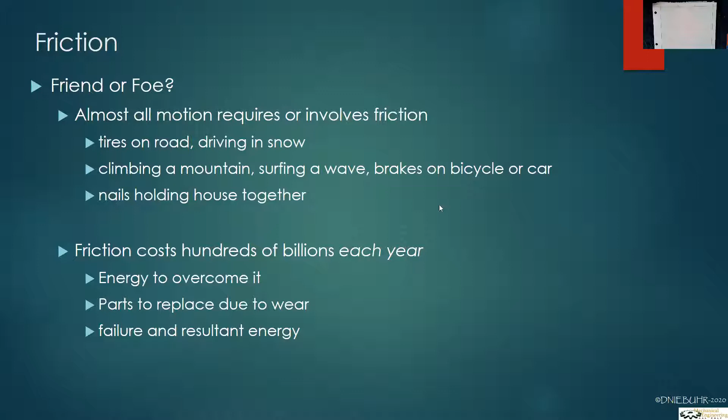And so how do we actually solve problems or calculate answers?

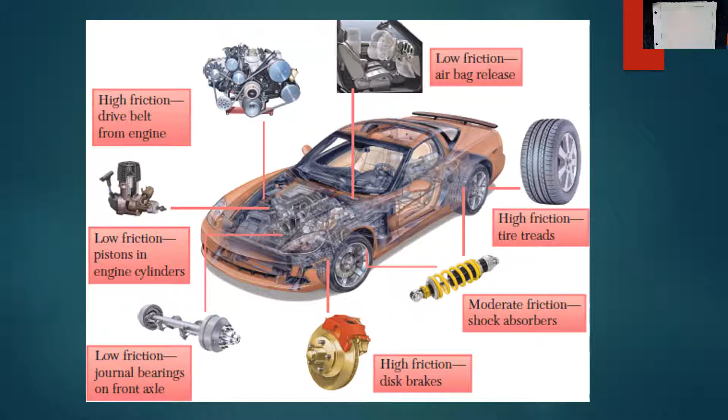Before we jump into that though, to have some idea of where friction comes from, think of two surfaces that are in contact - they're never really truly in 100% contact. If you have a book sitting on a table, or a piece of wood sitting on another piece of wood, or any hard, real engineering surface, you're only going to have about 1% of the contact area, compared to the observed area, actually in physical contact. That has to do with the natural surface roughness that exists on all surfaces.

Even surfaces that are highly polished still have a fractal pattern of roughness. The scale might be different - the distance between peaks and valleys might be a matter of nanometers. But as far as the distribution of peaks and valleys, it turns out that whether you're looking at something under an atomic force microscope or the coastline of a country, the pattern of the valleys is very similar. So it's an interesting idea.

But what does this really have to do with friction? When two surfaces come into contact and you press them both together, there's a tendency for those two high points to plastically deform. If you think about stress as force over area, you have a very small area and the contact forces become very high, causing a high stress that makes the two materials deform. Now when they deform, they have a tendency to lock together. So when you start to push and try to move two surfaces apart, it takes more energy to break the surfaces apart than it does to keep them sliding once you've broken them apart.

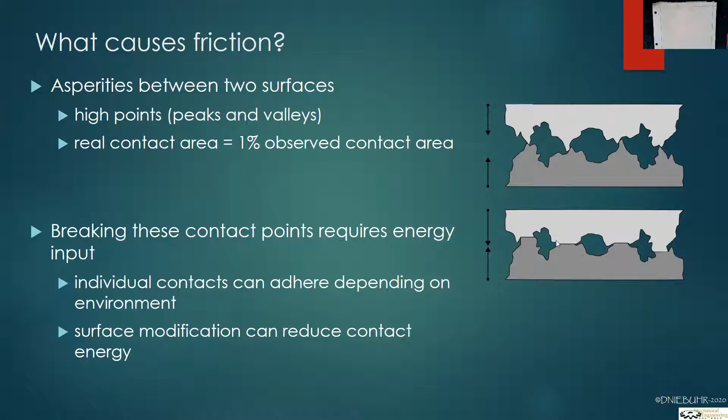For something that's on Earth, the advantage is that, with the exception of very few metals — the noble metals — oxides tend to form on surfaces, and these oxides actually form a natural lubricating layer between two opposing surfaces.

If I were to take two pieces of metal, say titanium or stainless steel, and put them together in a vacuum, they would actually stick together, and the force required to pull them apart would be really, really large. In fact, it would make the coefficient of friction appear to be a number as high as 100 — we'll discuss shortly what that means — but it loses its physical meaning in vacuum.

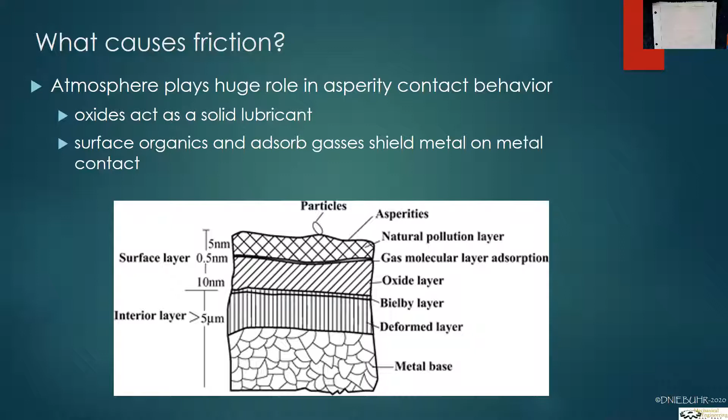Typically on Earth, though, because you have the oxide layer and you also have all these adsorbed gases and just junk — organic materials, oils from your hand — those help to prevent the two surfaces from really contacting metal on metal and essentially cold welding to one another.

An example of this was the Galileo high gain antenna, launched into orbit by the shuttle Atlantis back in 1989. It had originally been scheduled to be launched sooner, but because of the Challenger blowing up in 1986, it put kind of a moratorium on shuttle missions.

The way the high gain antenna operated, think of it as an umbrella — once the satellite was deployed, it was going to open up like an umbrella, allowing images to be more efficiently beamed back to Earth. This actually traveled to Jupiter and beyond and took some really high-res pictures of Jupiter and its moons.

Unfortunately, the unit itself was built at Jet Propulsion Lab down in Pasadena, and it traveled to Florida and back several times — I've read 3 or 4 times. As a result, the solid lubricants used in it became, essentially, not quite dried out, but they became fractured, and they didn't operate as designed.

That's a whole other detail, but you can't use liquid lubricants in space, obviously, because they'll just evaporate. So they use what are called dichalcogenides, which are a metal and a sulfur, like molybdenum disulfide — graphite's another example. They use these in space because they maintain their lubricating properties even in the absence of any air.

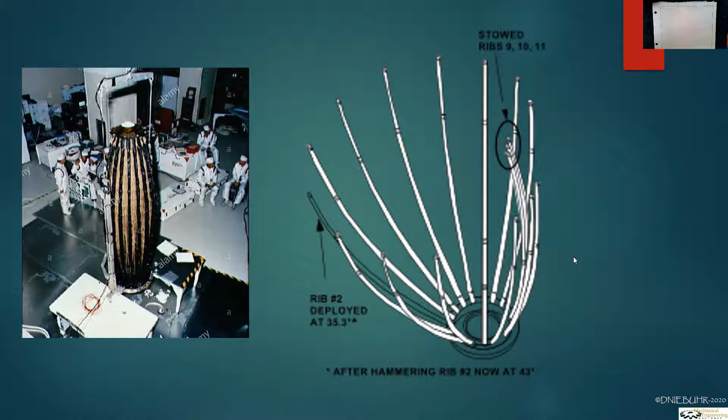Okay, now we're here to static friction. As you may remember from physics, you start off with just a simple block sitting on a surface. We know that the normal force is just going to be equal to the weight, or essentially whatever the reaction is of the surface to the block.

If we were to push down on the block with something besides the weight, that would add to the normal force. We also know that if you apply a force P pushing the block to the right, and assuming the surface has friction, it's not a frictionless surface, then the friction will match 1-for-1 with the applied load. So if I apply 1 Newton to the right, the friction force is 1 Newton to the left. If I apply 2 Newtons to the right, it's 2 Newtons to the left.

And so it'll match 1-for-1 until I reach the maximum friction coefficient, or the maximum friction force. So the friction max is defined as the coefficient of static friction multiplied by the normal force. Another way to say that is if you were to take the force required to break free and divide that by the normal force, that would give you your mu static.

And so once you reach that point, you'll be in this transition mode where the material will start to, or the block will start to slide.

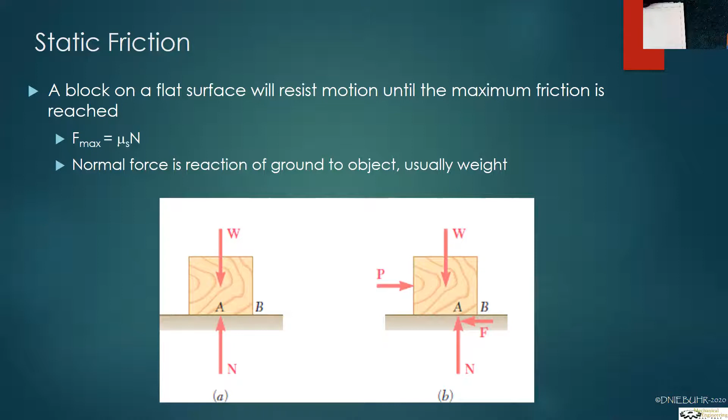So if we think of it from a starting point, if we apply P when it's vertical, it's just going to be added to the normal force. So in this example, we have no sliding friction or no friction at all because there's no lateral force. This is in the first situation.

In the second situation, we're applying P at an angle. So we have the y component of P is going to be added to the normal force. And that's why we say normal force is equal to Py plus W. And then we also have the weight. But at this point, we haven't created enough force to overcome the mu static times the normal force. So until we reach that point, we aren't going to go anywhere.

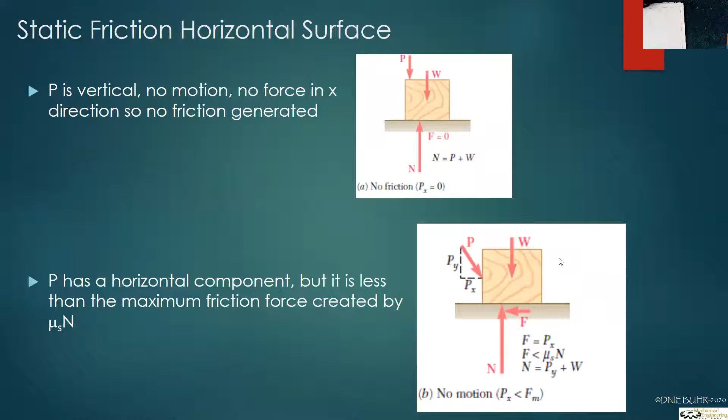And then we get to the third stage, which is where we're just about at impending motion, and that would be where the x component of P is equal to the mu static times normal.

So when you say equal to, mathematically that's easy to see, but in reality it doesn't just go from not moving to moving. There's kind of this stiction transition, and that transition is difficult to measure in real life because, as you can imagine, the asperities, the peaks and valleys of your surfaces are locking, unlocking, locking, unlocking. And so from a measurement standpoint, it's kind of a rough area, and then you get the release, and then the material starts to move.

And that's what we have in the last case, where you have motion. And so at that point, the friction force drops because your kinetic coefficient of friction, mu kinetic, is generally always less than mu static. That means it requires less force to keep it moving than it did before.

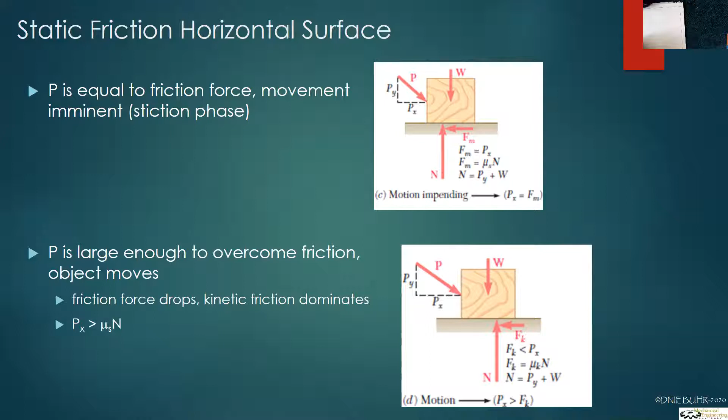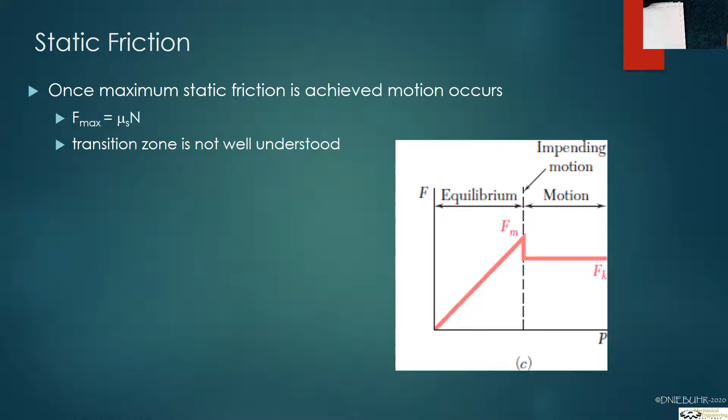All right, so let's talk about static friction in a simple example. I picked this example because we have an object on a block, and it has a mass of 50 pounds, and then we can apply a value P to it however much we want.

And we can see that unlike our other problems that we've done in this class, there's usually one way to solve them, or maybe a couple ways. You can use a force triangle, or you can sum moments. But there's usually one defined situation, or one defined outcome, or we're finding a moment, we're finding a result, we're finding force.

In this case, friction is a little more tricky because we have multiple things that can happen in the situation. So if you picture it, if I apply a force P, and if my P force is great enough, that block is going to slide up the incline. If my P force is not enough, let's say there was no P force, then most likely that block is just going to slide down. Or you have a region, a range of P values, where the block will just stay put. So there's enough to keep it from sliding down, but not enough to start it sliding up. And that becomes the tricky part of figuring what that is.

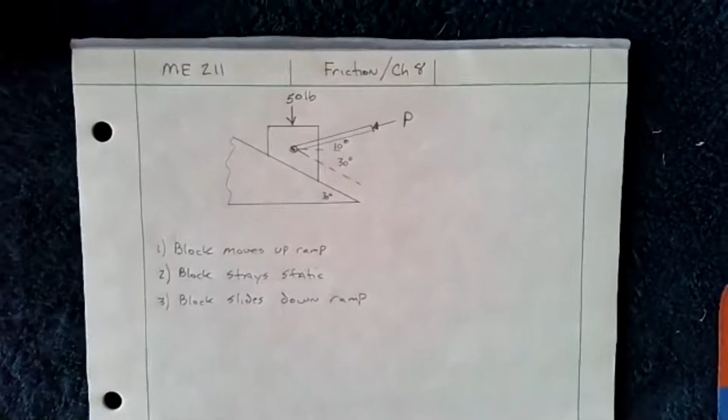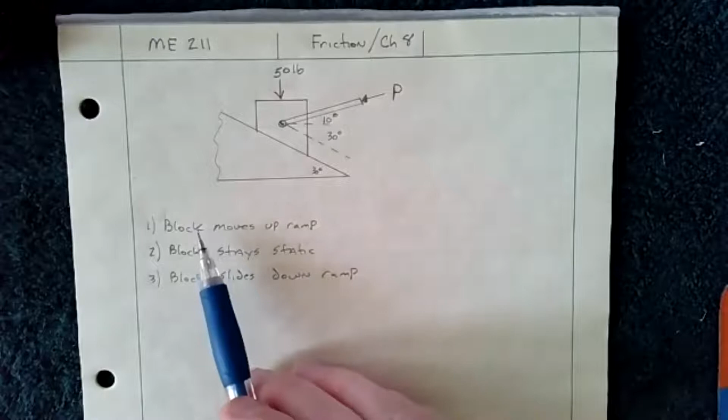So let's look at some different situations. Here's our drawing. We have mu static and mu kinetic, 0.4 and 0.3 respectively, and then we have this load. Here we have this redrawn, and so I have my load P. I have this whole angle's 10 degrees to the horizontal, and then I have my 50-pound load here, and the block can move up the ramp, block stays static, or block slides down the ramp.

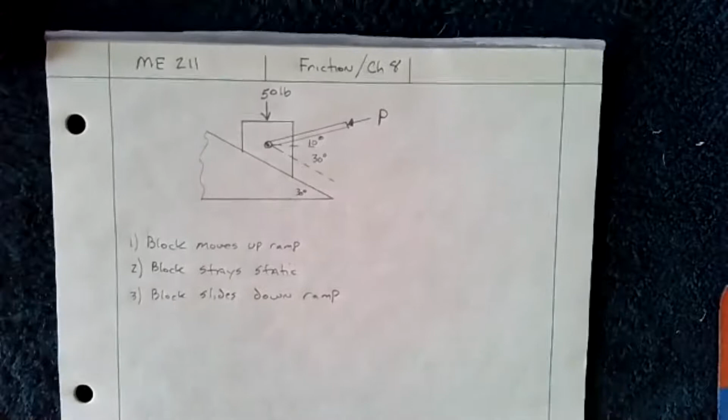So what are my situations? Let's try something first. Let's say we didn't have anything, let's say we just started with no load whatsoever, let's just say P was 0, then what would happen? Let's go ahead and draw that free body diagram and see what that would look like.

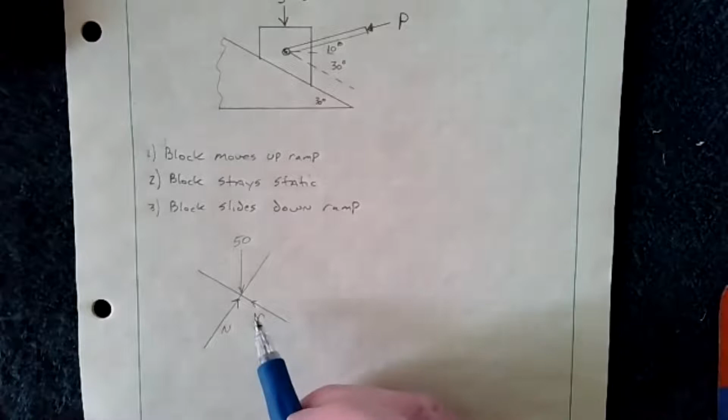So here, if we have no P whatsoever, what I've done is I've tilted the axes. This is 30 degrees here, and we have friction force going up the ramp because if it wants to slide down, friction is going to oppose it. If N is going up this way, that's going to be normal to the surface.

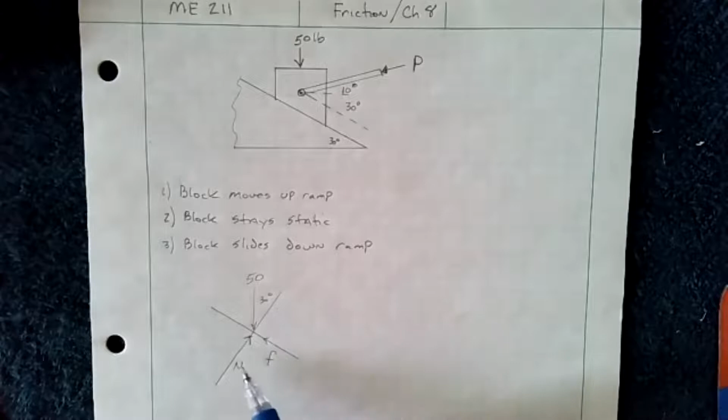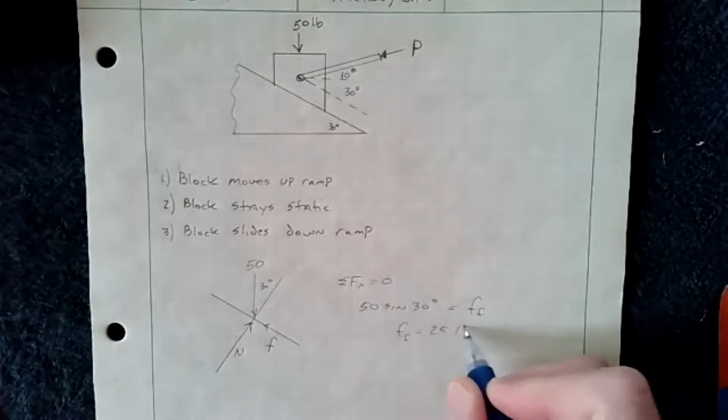So we can see from this drawing that if we sum the forces in the x direction to 0, we know that 50 sine 30 is 25. So 50 sine 30 has to equal the friction force. So the friction force in this case equals 25 pounds. Now, what that means is when I say the friction force, that's how much force I have to have in friction in order for this to not move.

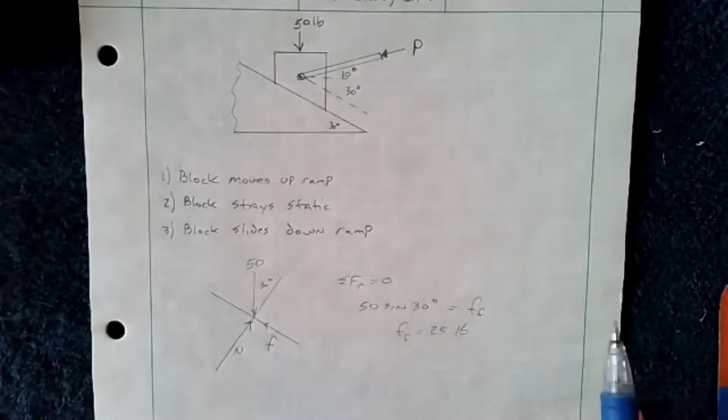So the way I want to write this is: this is the force required for equilibrium, because anything more than that, it's going to move. So the question then is, do I generate that much friction force?

Now, the friction force, the only time I can really know what it is is by looking at what's opposing it. Right now, I know there's 25 pounds of force wanting to slide down, so in order for it to stay still, I have to have 25 pounds going up. But how much friction do I really have?

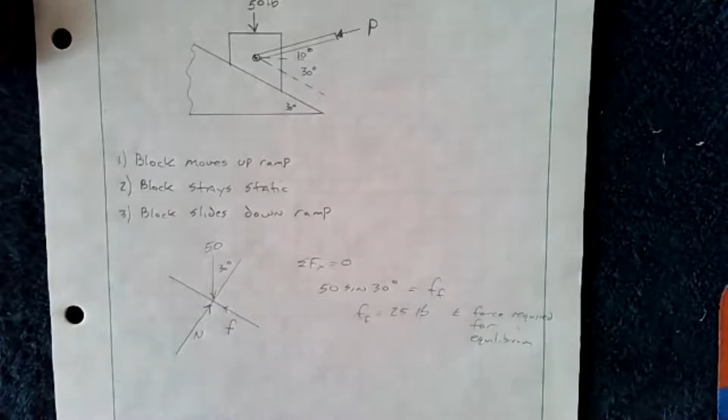Well, I know that my maximum friction, F max, is going to be equal to the static coefficient times the normal force. So if I look at this, I say, well, what is my normal force?

I can see that if I sum the forces in the y to 0, normal force is going to be equal to 50 cosine 30. I could have said normal force minus 50 cosine 30 equals 0, but I think we understand that's all there is in that direction. So 50 cosine 30 gives me a value of 43.3. So I know my normal force is equal to 43.3.

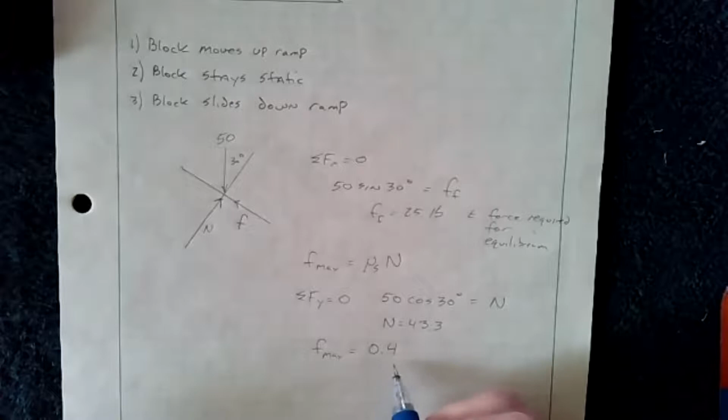And so therefore, my friction max is equal to 0.4, because that was my given friction coefficient, times 43.3. And that gives me 17.3. So the block is going to slide because I have 17.3 pounds of friction force available. That's the maximum. But I have 25 pounds of force, so it means it's going to slide.

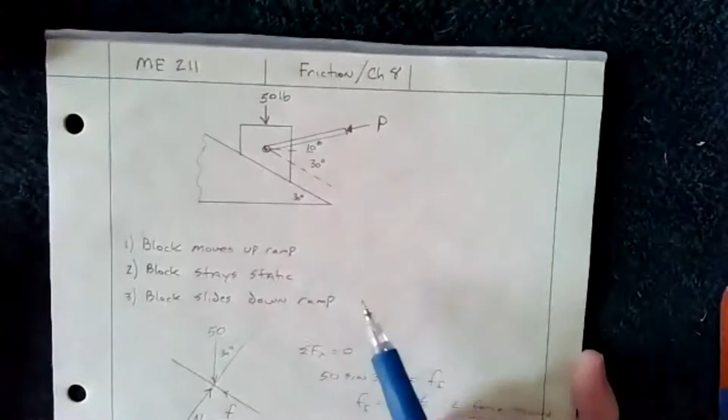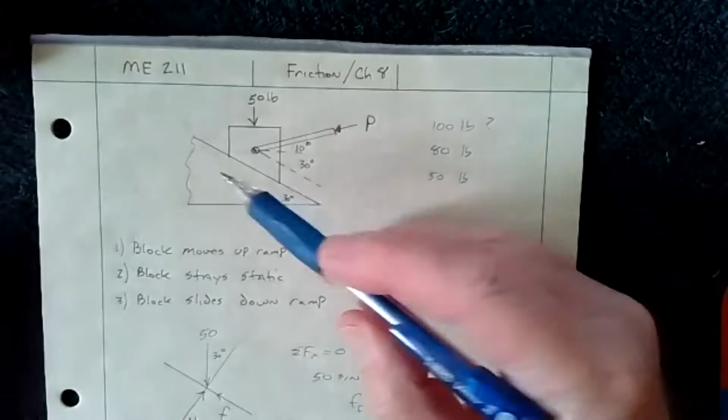So then the next question is, we could apply a force P, as we did here. What happens if I apply a force of 100 pounds? What about 80 pounds, or 50 pounds, and so forth? We know that at some point, our force is going to be great enough that it's going to slide. We know that at some point, the force is going to be great enough that it doesn't slide up, but it doesn't slide down either — it holds it in place. So the question then is, where is that point? How do we figure that out?

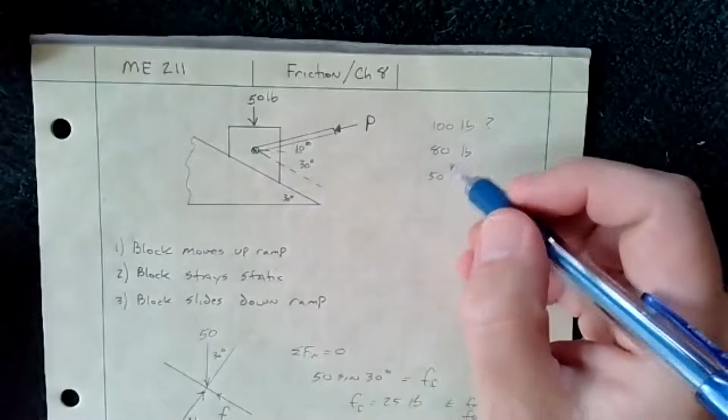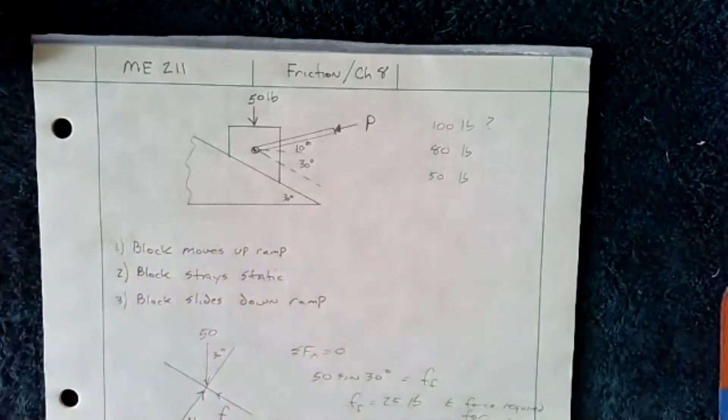It'd be nice to know if I'm going to apply a force P, how much can I apply, or where is that sweet spot? That's where we can actually solve. What we can do is look at it, because we know that...

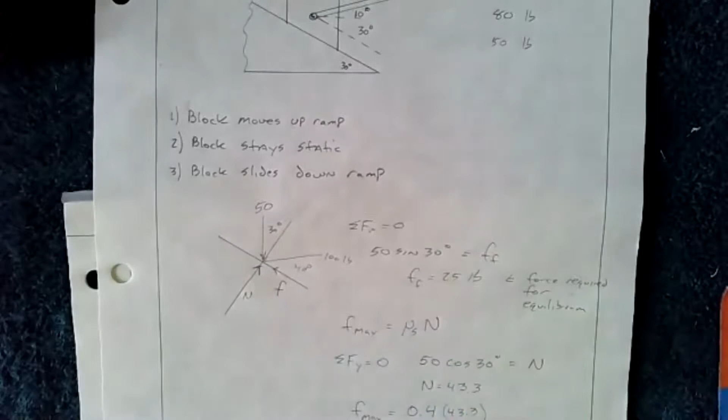I could have said, calculate: if I gave you 100 pounds, you could apply a force P here at 40 degrees and 100 pounds. You could have gone ahead and changed all this, because if I put 100 pounds here, my normal force would have been 43.3 plus the sine of 40 times 100. So it increased N, it would increase the maximum friction, but then I would have had the cosine of 40 times 100 moving up the ramp also. And the other thing is that this would have changed. So it's probably worth running through that so we're all on the same page.

So let's go ahead and draw that real quick and do that problem. Here we have 100 pounds. We know that whole thing is 40 degrees from here down, because this was 10 right here. So I've drawn that, tilted the axes for ease. Normal force is still there. Let's go ahead, just like we would normally do a problem — the math itself is not difficult, it's just like before, it's just understanding how to apply it. So, sum of the forces in the x to 0.

And we have the friction force. Now, of course, the friction force has switched sides because now we're assuming that we're going to push it up the hill. So the answer comes out—if I've assumed something wrong, it'll tell me, and I'll show you that. So I have my friction force going to the right, plus 50 sine 30, also going to the right, minus 100 cosine 40 equals 0.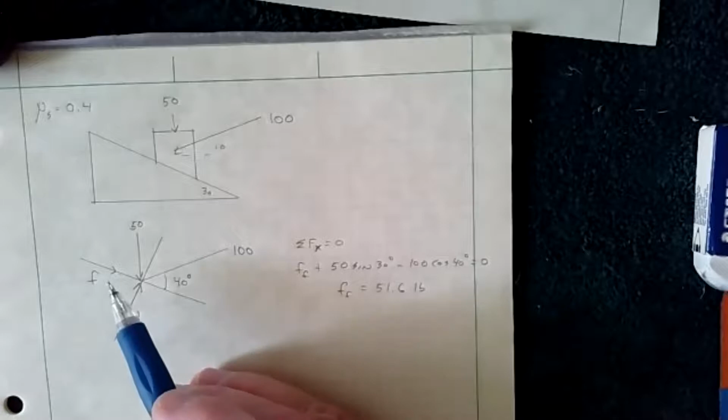So now I have to look at how much friction force I have, right? Because I need to know, is my F max greater than 51.6 pounds? That means no motion. If F max is less than 51.6 pounds, then I have motion. And so I know that F max

equals mu static times N. So really, if I solve for N, I know mu is 0.4, then I can determine that. So go ahead, I sum the forces in the y direction to 0. And I know that I have N going up minus 50 cosine 30, and that's also minus 100 sine 40. That equals 0. So I get N equal to 107.58.

And so my F max is equal to 0.4 times 107.58, and that's going to equal 43.03. So what did I say? My F max is 43.03.

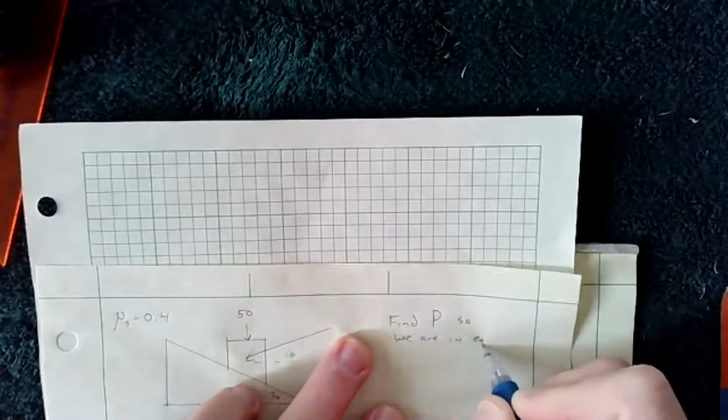Or I could just set up an equation and solve for it. So if that's the case, looking at this same setup here, so let me do this. We know what we're going to do now is we want to find P. So we are in equilibrium. All right, so we're going to find P so that it doesn't go anywhere. Now this is just one facet of it, because what we'll find is let's just do this one first and I'll explain.

So again, we have our free body diagram here, and we're assuming we're going to go up the hill. So we have friction opposing that. So what we can do then is, again, we're going to define what is our friction force. So we'll go ahead and say our friction force is equal to P cosine 40 degrees minus 50 sine 30 degrees.

So that's what our friction force is, isn't it? Because I just had friction force, and that would be so that these are equal, right? We're saying we want them equal. So we want our friction force equal to whatever force is there. So that's going to be P minus that. And then we know that F max, friction force max, is going to equal

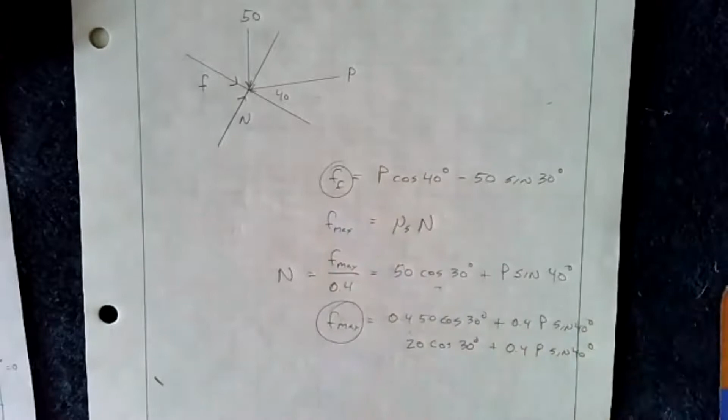So now what I'm going to do is set this equal to this, because I know we want those equal, which will allow me to solve for my one unknown, P, where the friction created by the normal force equals the maximum friction created. Now, what makes this problem harder is that normal force isn't constant. As P gets bigger, N gets bigger, which means the friction force gets bigger too, so we can't hold it constant.

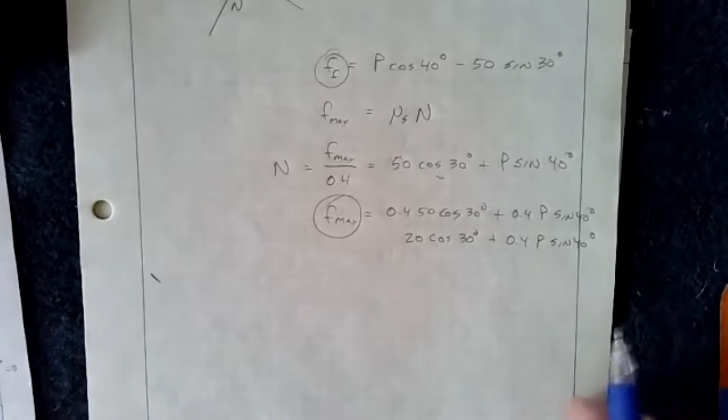So if we set those equal, we end up with this. Let me draw it real quick. So here it is written out: P cosine 40 minus 50 pounds sine 30 equals 20 cosine 30 plus 0.4 P sine 40.

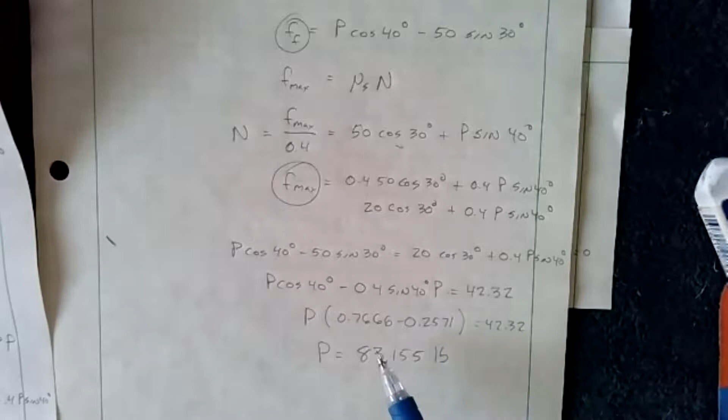This is essentially setting the friction force to its max. If we solve, we know that's a number and that's a number, so we move those to the other side and move this back to this side. We get P cosine 40 minus 0.4 sine 40 P, factor out the P, solve, and we get 83.155 pounds. So that tells me at that point, if I apply anything more than 83.155 pounds, it's going to slide; anything less, it won't.

Now, what we haven't figured out is how much less before it starts to slide. We showed that if P is 0, that's not going to hold. But where's the lower threshold? There's a certain amount of P we'd have to apply so that this is still held up, and we could solve for that too. We would have to rewrite these equations, the only difference being we'd now need to move friction to the other side.

That's what's weird about friction—it's always opposing motion. So if we think it's going to slide down, we change it so the friction points the other direction, then set up these equations the same way, only with friction pointing up, and subsequently solve.

Now, it turns out you could have solved this whole thing with a force triangle. That's something I want to mention real quick: this idea of what's called an angle of repose. I'm not going to dig too deep into it, but it's an alternative way to solve some problems. Where it comes from is, remember, we have a block.

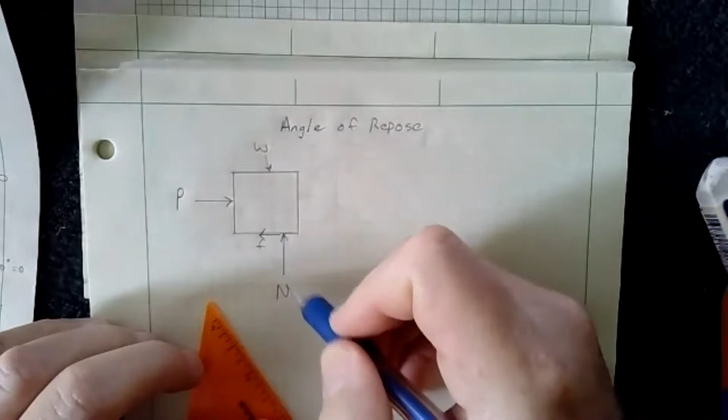Let's say we know it has a certain weight, so therefore it has a certain normal force. Again, we're drawing with single vectors just meaning we don't care where they contact. In this case, we're going to say I've moved it over here so I can illustrate this. Now we know this is your friction force here. So what if I took the normal force and the friction force and combined them into one? Let's say I did this.

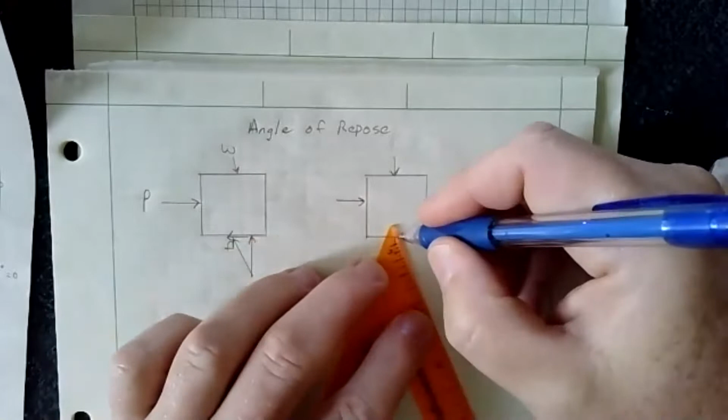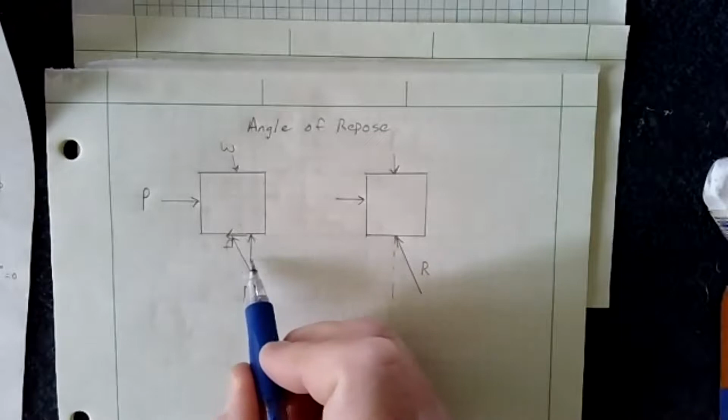So instead of the traditional normal force and friction force, I have this, and with respect to the horizontal, I have that, and I call that R. Because R, really, what does it equal? It equals, if you add this and this, you get that. So this angle here is called phi, or the angle of repose.

And it turns out, through a simple derivation which is in the book, that if you take the tangent of phi, you get mu static. Or, on the other hand, if you take the inverse tangent of mu static, you get phi. This simple relationship makes sense because if I take the tangent of 45 degrees, what do I get? I get 1.

Well, that makes sense because if this was 45 degrees, it would mean my normal force and my friction force were the same, which would mean if I said friction force divided by normal force equals 1, right? So the math works out, because at 45 degrees these are both equal. And essentially, for our purposes, you can't have this ratio be greater than 1.

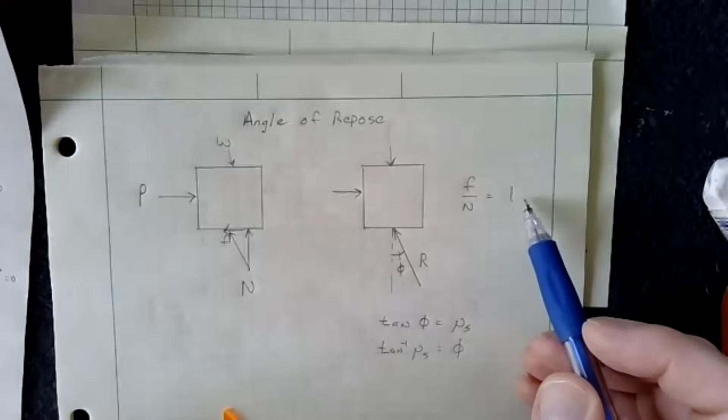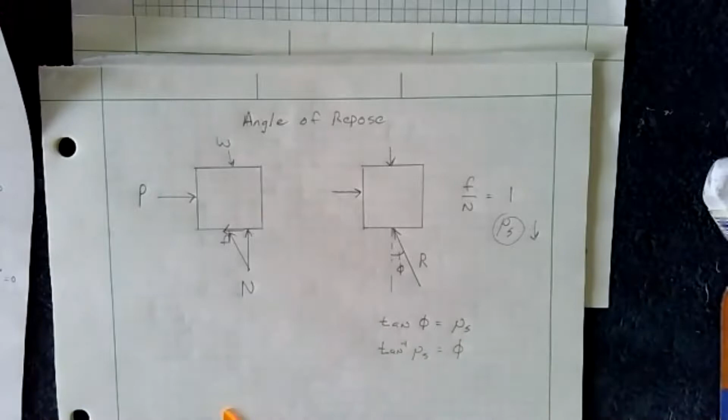Now, it turns out this number could actually be 100 in a vacuum, but it loses its physical meaning. So for us, friction—this ratio of friction force over normal force, which gives us mu static—is always going to be a number less than 1, generally 1 or below. So that's the basic idea of angle of repose.

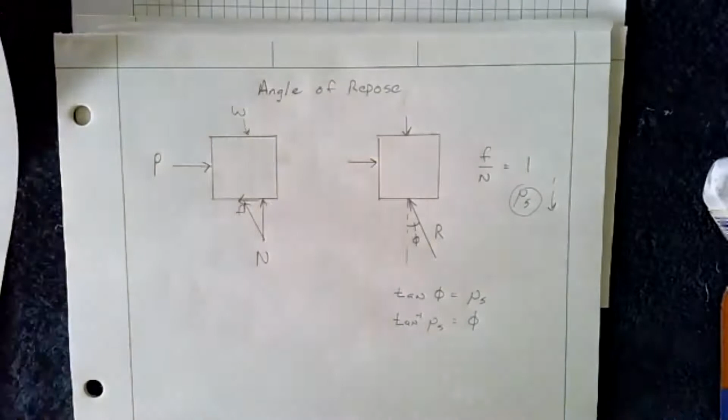So it turns out we could have, in trying to figure out our P value, taken this 50, combined the normal force and the friction force, and we'd know this angle because it's just the inverse tangent of 0.4.

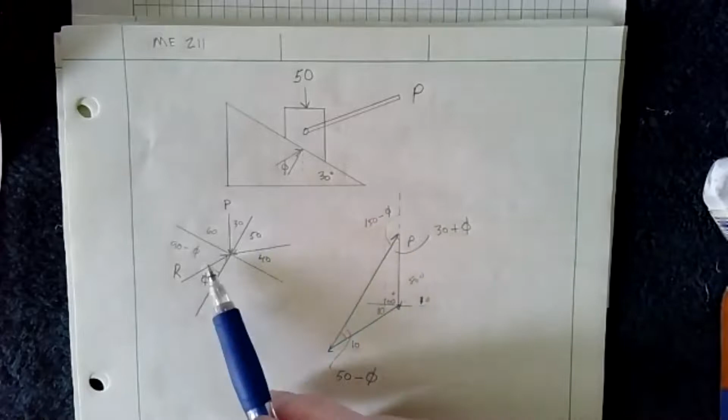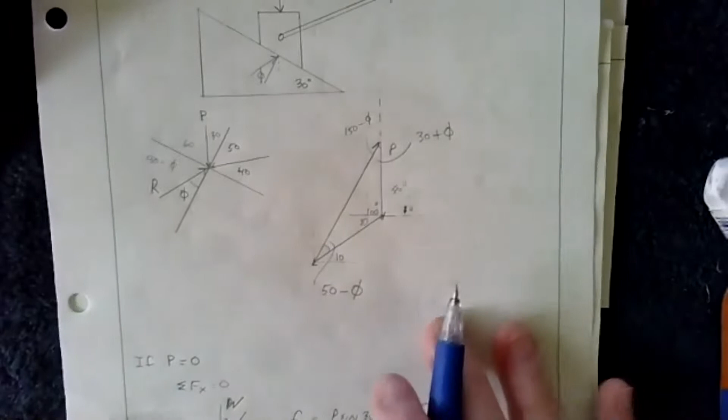And if we did the trig real quick, we would have gotten this triangle where this internal angle would have been 150 minus phi, this would have been 30 plus phi, and this angle here ended up being 100 degrees. So if you went through and took the time to do it, you could see it. But what it would allow you to do then is quickly use the law of sines to find what P was.

I'm not going to do the problem, but it's in one of the examples in the book, in the first couple examples in the problem set. I think it's problem 8.5. Most of you probably have the solution manual, so you can see it. But the point is that the force triangle can come back and help you in this.

I'm not going to spend a lot of time on it because I want to get you guys ready for the final. The final is going to deal with a single friction problem among other things, but there will be a friction problem on there. The type of problem will most likely be something where you have to determine at what point something starts to move based on the load applied to it and the friction that it creates. So one of the things about these problems is there's a lot of substitution.

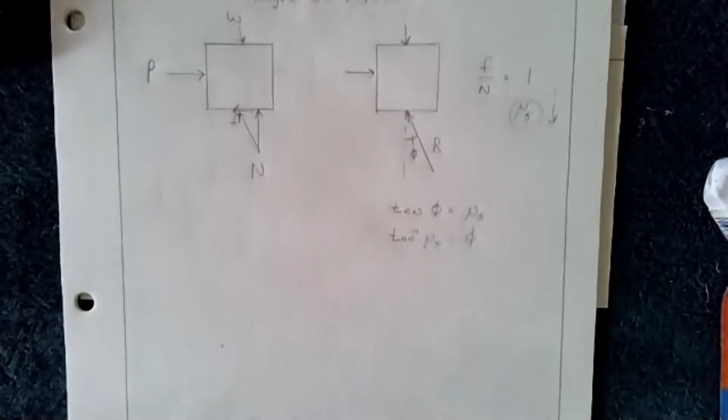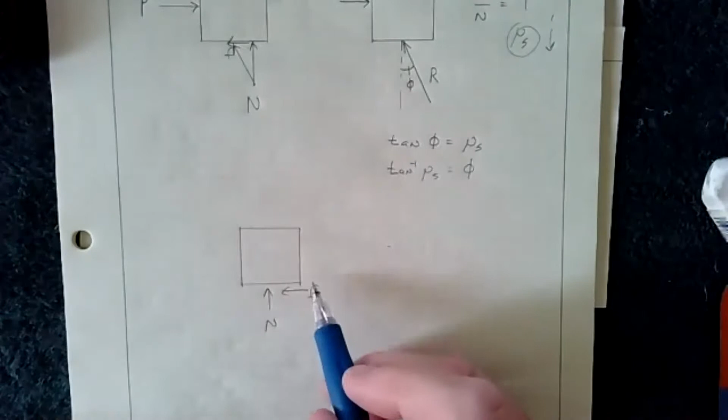The reason for that is because we know that in general, anytime we have an object, we have the normal force and we have the friction force. So some of the forces are in the X, forces in the Y, but we know that these are related by mu static. We're going to use that fact to solve.

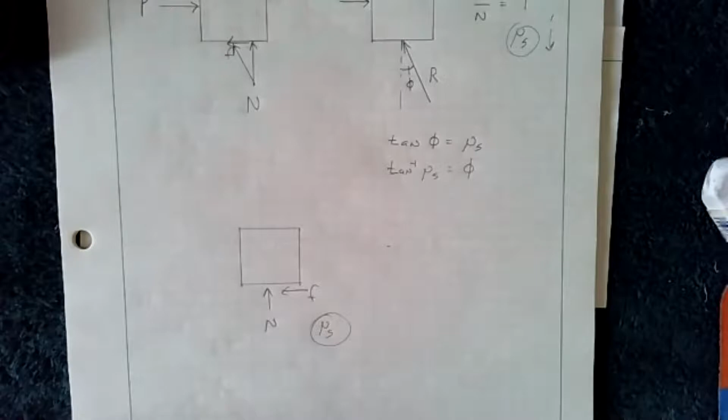So let's go back to here. We could have done more with P, but I think you got the point of that.

So let's look at this example. This is on the previous problem, and this is on worksheet 24. I want to do this problem, and then that'll be it for this lecture. Then I'm going to do another lecture with more examples of friction. I know I went through a few things quickly.

One final comment about the angle of repose is that you don't have to use it. It's just like force triangles, you don't have to use them. If it convolutes things, don't worry about it, just keep it in the back of your head. If you feel comfortable with trig, it can make things a lot easier. For example, in that problem where I derived it by setting the two equations equal, that wasn't very tough, but if I used the force triangle, it was done in just a few minutes. Again, it's about how comfortable you are with trig.

All right, so let's look at this problem. Here, what we have is a 200-pound pipe, half section, sitting, and you have this cable at A, and then you have this tension pulling it up. So what we want to know is how much tension, or what force, do we have to put on it before this thing's going to tip over or slide.

So those are the two options, as you can imagine. If I'm pulling it and the angle is 30 degrees where alpha is defined, then as I pull on it, the thing's either going to want to tip at B or it's going to want to slide along A and B. So picture one extreme: if the tension were running along the x-axis to the right, there'd be no moment because it would be at A, so therefore it'd have to slide. Whereas if we put the tension completely vertical, there'd be no way it could slide, it'd have to tip. So there's some angle, some point, where T is going to cause it to either tip or slide. We just don't know what it's going to do.

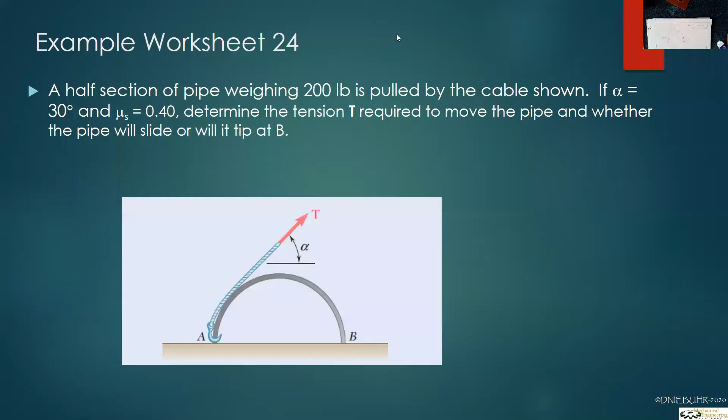All right, so here we have our problem. Notice there are no dimensions given, so probably that means we don't care about them. But if that bothers you, you can always pick the radius equals 1, in which case it will drop out. So in this case, we have our free body diagram.

We know that tension is coming up here. Since that's coming off at a 30-degree angle, and we draw a line from the center to the tangent, that has to be 60 degrees because it's going to be 90 here. So that's just geometry. We know that the normal force A and normal force B are going to be at contact at each of these points, and the friction is going to be going that way because we want to move to the right, so it's going to oppose.

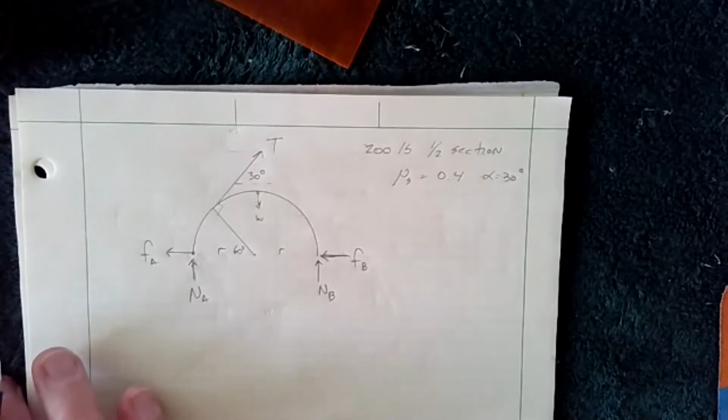So if you're not sure how to start, look at the problem and ask what we're trying to find. We're trying to find T. So first, just like before, sum the forces in the X, sum the forces in the Y. I'm not saying all problems are just simply that, but for the most part, if you start with that idea, looking at what you want to find, and then eliminating the unknowns, that seems to work pretty well in most friction type problems. I've put an assignment up on this, and I'd recommend looking it over because it will help you on the final, being familiar with this.

So we sum the forces in the Y to start. We have NA plus NB, the normal force at A and B, minus the 200 pounds coming down, plus T sine 30. So whatever T is, sine 30 is going up, that equals 0. So we can solve NA plus NB, and that's going to equal 200 minus 0.5 T. So we have that now.

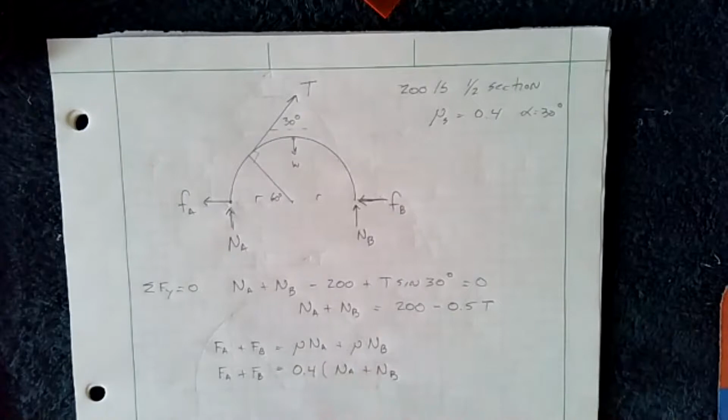There's an equation, we'll come back to that. Now we also know that for this thing to slide, friction A plus friction B is going to equal mu static times normal force A plus mu static times normal force B. Another way to write it is 0.4 times NA plus NB, and that's going to equal FA plus FB. Notice I've drawn this NA plus NB. I also know that NA plus NB equals 200 minus 0.5 T. So this is probably going to be useful soon, because remember what we're trying to do is eliminate variables, so that we only have as many variables as we have equations.

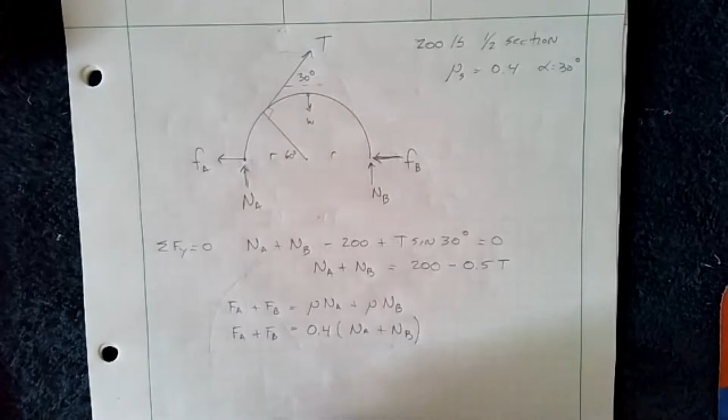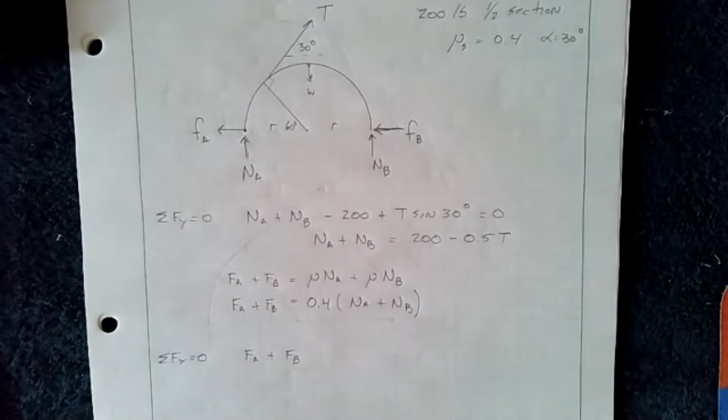So we'll hold that thought, and we'll go ahead and sum the forces in the X. If we sum the forces in the X to 0, that will give us FA plus FB. We notice that summing the forces in X gives us T cosine 30 degrees, and that's going to be minus FA minus FB equals 0.

All right, so now let's hold that and come back up here, which I probably should have done in the first place. So I know I can substitute FA plus FB equals 0.4 times 200 minus 0.5 T. All I did was take this value and stick it down here and rewrite it. And that gives me 80 minus 0.2 T, and so that's what that is.

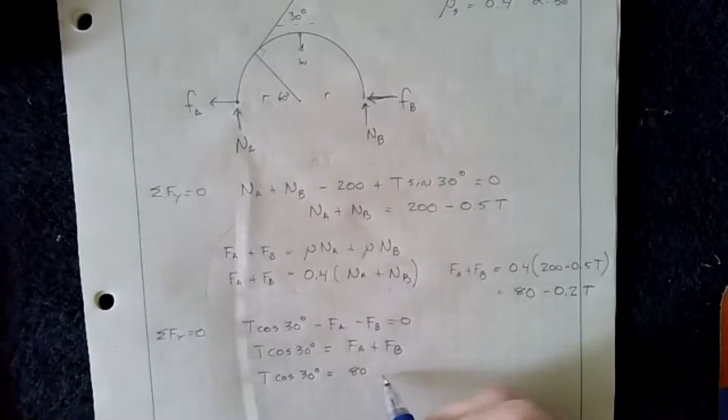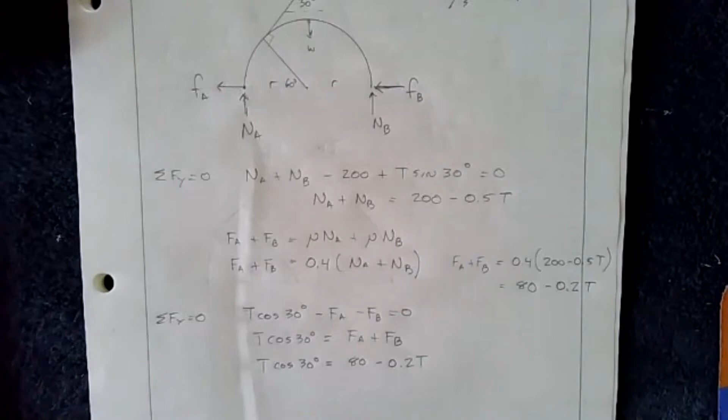Now if I come back down to this value, what do I have? I can rewrite this as T cosine 30 degrees equals FA plus FB. Or another way to write it would just be T cosine 30 degrees equals 80 minus 0.2 T. And in that case, I can go ahead and solve for this, and as I solve for T, I get T equal to 75 pounds.

So effectively this ends up being T, and if I move this to the other side and factor it out, it's cosine... actually, to make it easier, square root of 3 over 2 plus 0.2 equals 80. This is a number just a little bit bigger than 1, so T ends up being about 75.0 pounds.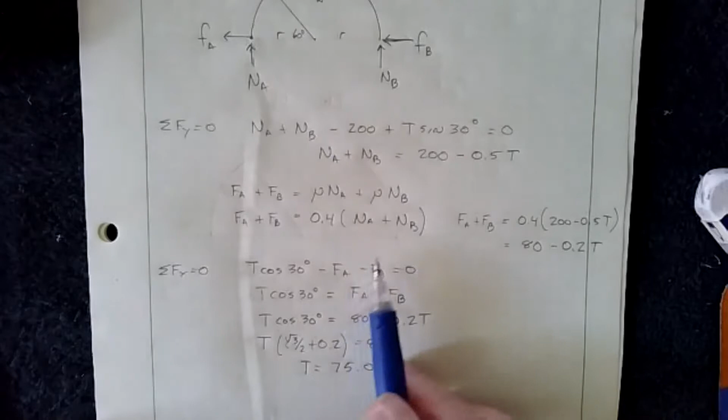Okay, so that's how a lot of the friction problems are done. You'll notice how I didn't do anything fancy. I just know that if it's going to move—and that's the caveat, unless you know it's on impending motion, you have no way of knowing what the friction is, because the friction can only be found with mu times N when it's at a maximum. So we assume it's about to move, friction's at a maximum, and we're able to then substitute as shown between the normal force times mu and the friction force. All right, so hopefully that made sense.

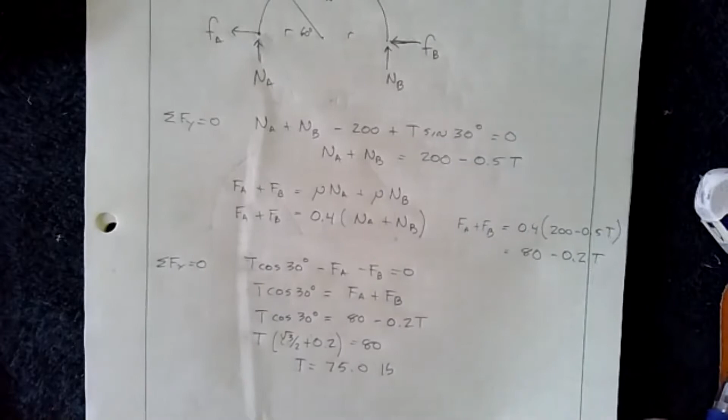So now we have T is 75 pounds, but we're not done yet because we know that's how much it's going to take, but we want to know, is that going to cause the item to tip over, or is that going to cause the item to slide?

So let's look at what we have now quickly. We have T, and we know that at this point here there's T sine 30, and there's going to be T cosine 30. Now this is A over here, and this is B. So it makes sense that if this thing's going to tip, it's going to rotate about B.

So what we're going to want to do is sum the moments about B. Now what would be the criteria for the fact that this thing has tipped? It would be that the normal force here is 0 or less than 0. Now a normal force less than 0 has no physical meaning, but if that's the case, it means that this thing is no longer in contact with the ground, therefore we know it's tipping. If the normal force over here is greater than 0, we know that the whole item is actually sliding.

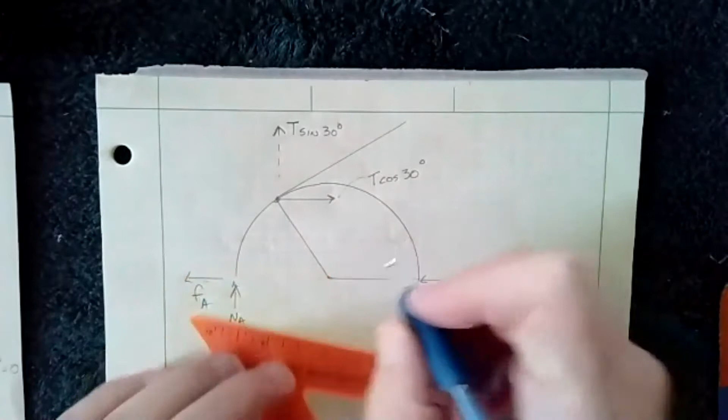So again, we still have our normal force A, normal force B. We have friction A, friction B. Now, if we think about distances, what do we have? We have this distance here we're going to call 1 radius. This distance here to here and to here, because we're going to need these for our moment. We know if that's 60, then this is going to be R sine 60, and this is going to be R cosine 60. All right, so that will give us our locations for this and this.

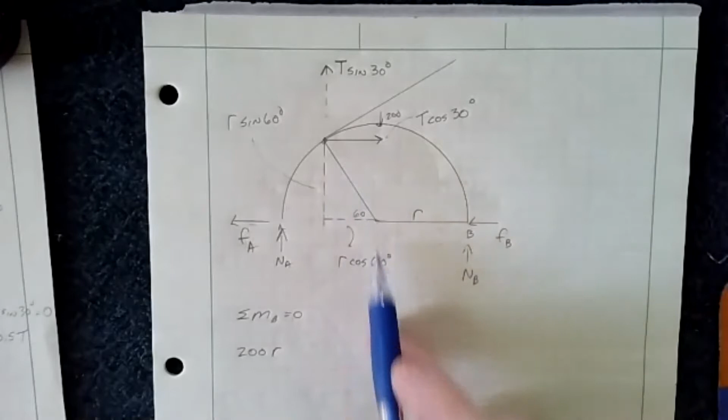So let's go ahead and sum the moments about B equals 0. We still have the 200 pounds, of course, 200 right in the center. So we have 200 times R, because it's 200 pounds going that way around B. What else do we have? We have the normal force. So 200 pounds times R minus normal force at A times 2R.

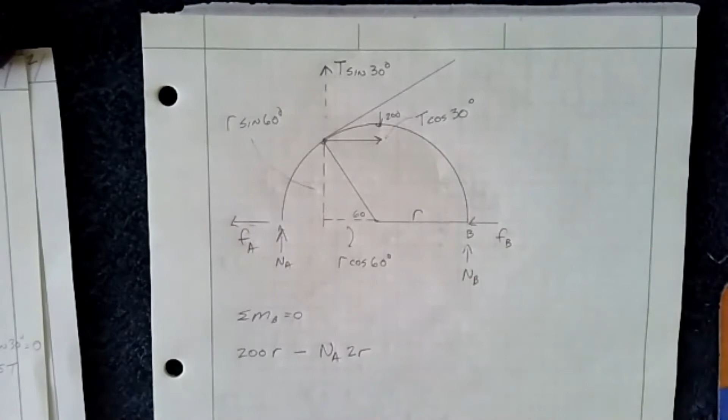And then minus T cosine 30 degrees, and its distance is going to be times R sine 60 degrees. And then that's going to be minus T sine 30 degrees. And what's its distance? It's the T sine times R plus R cosine 60 degrees.

So there's that, and all of that has to equal 0. All right, so we have everything. We have the moment from this, and then A, and that's it. And of course, the weight. So the weight's the only thing keeping it. Everything else wants it to go the other direction.

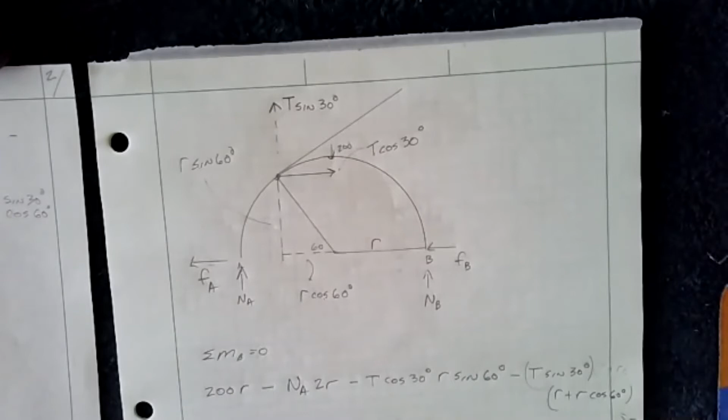So we're going to go ahead and simplify this now. And if we do, we end up with 2 NA. Now, one thing you can see right away is that the R cancels. We have R here, R here, R here, and R here. So all the R's can be divided out. That's why I said earlier it doesn't really matter.

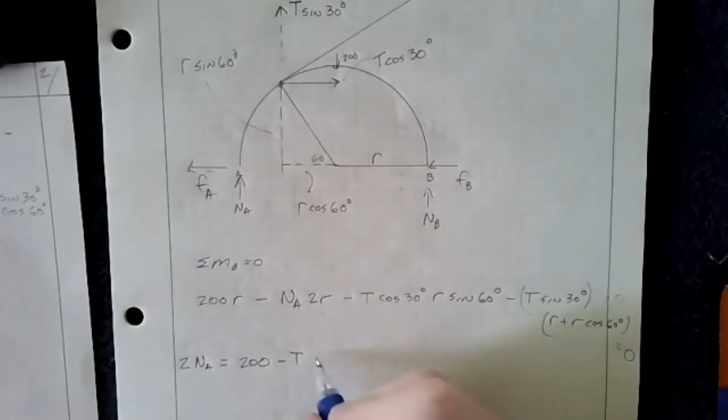So now we have 2 times the normal force A is going to be equal to 200 minus, and I factored out the T, and it's going to be times cosine 30 sine 60 plus sine 30 plus sine 30 cosine 60. Okay, and that's our equation, and that's equal to 0. So here's our equation now.

So we're almost done. We know that this is 75 here. We can plug in for that, and then we can look at all these values. We know that the cosine of 30 is the square root of 3 over 2. The sine of 60 is also the square root of 3 over 2. The sine of 30 is a half, and that's a half, and that's a half. So what we end up with is 0.75 plus a half plus a quarter. So what is that?

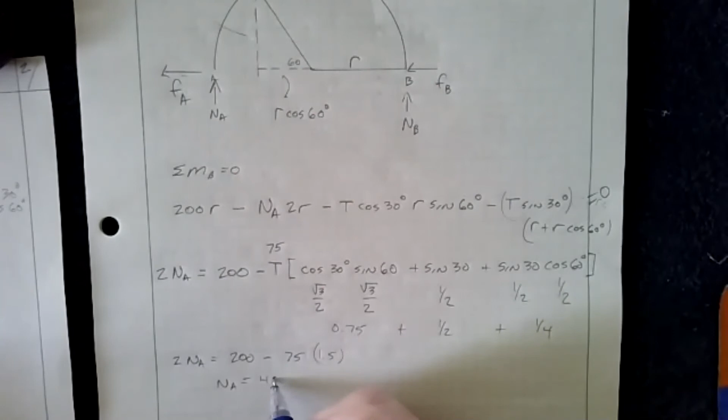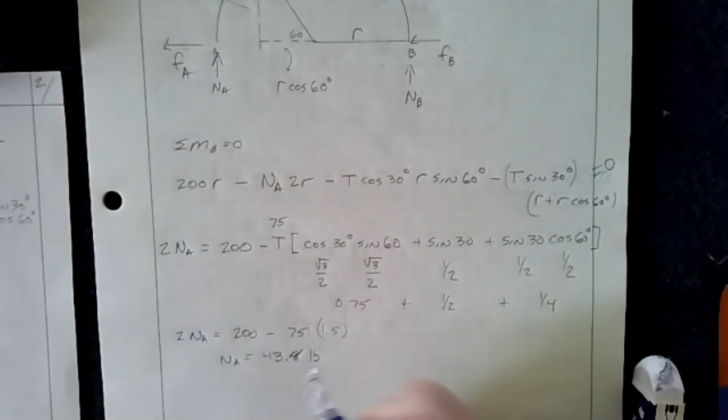That's essentially 1.5. So we solve, and we have 2 NA equals 200 minus 75 times 1.5. And NA ends up being 43.8 pounds. The fact that it's a value larger than 0 is all that matters. So we know that it slides, it doesn't tip.

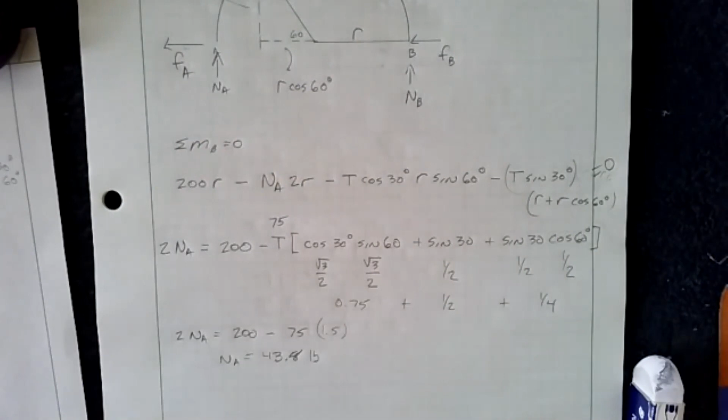All right. Okay, so that's 2 types of problems. I'm going to come back in the next lecture, talk a little bit more about friction problems and some examples. I'm going to mention wedges briefly, and then may have a third lecture. I'm not sure yet if we need it, but I'll have at least one more lecture on friction. So hope this made sense, and have a good day.